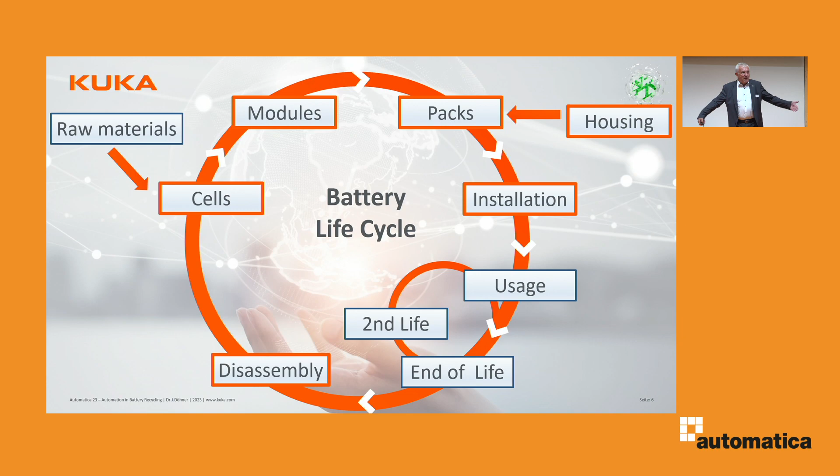Then you need to get these batteries into the car, the installation. We have some solutions here. And then we like to use electrical cars, but it's not a business. Once the car has been on the road for a while, there is the end of life, and then time will tell. Maybe there is an opportunity for a second life before the battery is refurbished. And the first step of battery refurbishment is the disassembly, and then comes the recycling in the narrow sense. And then depending on the outcome, it goes into making new cells, or what is not usable goes into disposal. So that's the battery life cycle.

So the first aspect, of course, is sustainability. Yeah, we all want to save CO2, we want to save energy, we want to protect the environment, be very responsible in the consumption of natural resources and in avoiding waste. So this is a very nice ideologic picture. It gives some triggers, but unfortunately this does not make a business case, as reality tells.

So the next aspect is availability. The materials that are used in battery production are not readily available in large quantities, at least for today's dominant cell chemistries. You have lithium, you have cobalt, nickel, manganese, and these things. And number one, this is a limited resource in that there are no billions of tons available on the Earth.

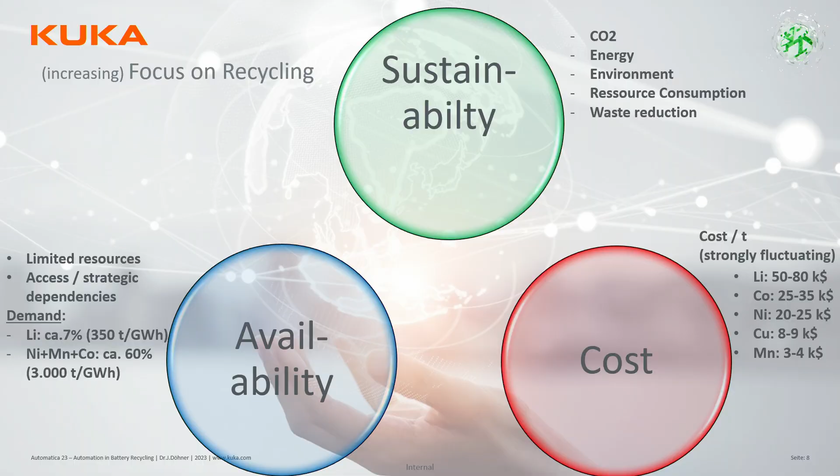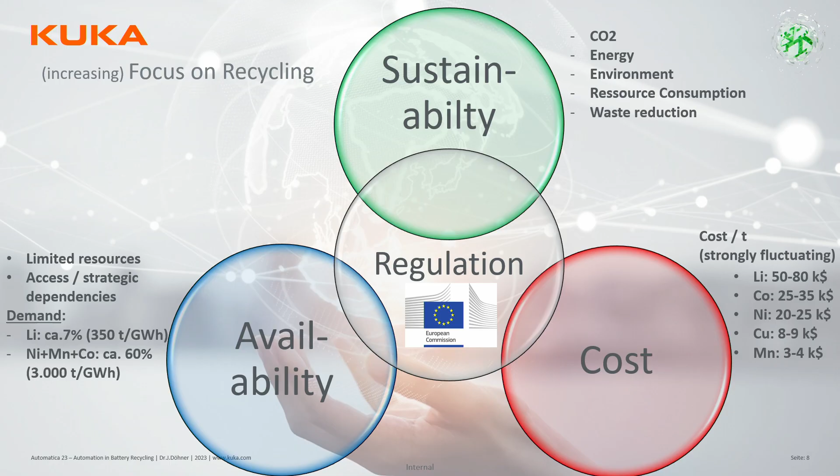So if you multiply these figures, the demand and the cost, it makes perfect sense that recycling is a good way to save money, reduce strategic dependencies, and keep material in circulation. And because this is so, there is regulation. If people are convinced it's necessary, the fact that there is a law and it's mandated is even adding more to convincing people that this is the way to go. So there is some regulation currently in discussion, the new European regulation on batteries. I'm not going into detail, just to give you a brief overview.

This is the structure, so it's a very, very comprehensive piece of work covering many areas. And the most important aspects are establishing through regulation a level playing field, so ensuring that for batteries that are used in Europe, all rules apply whether batteries come from North America, from China, from Southeast Asia, or from local suppliers. So this is one key aspect. The second key aspect is enforcing the sustainability spirit, so establishing a circular economy, including batteries. And then the third aspect is reducing the environmental and social impact.

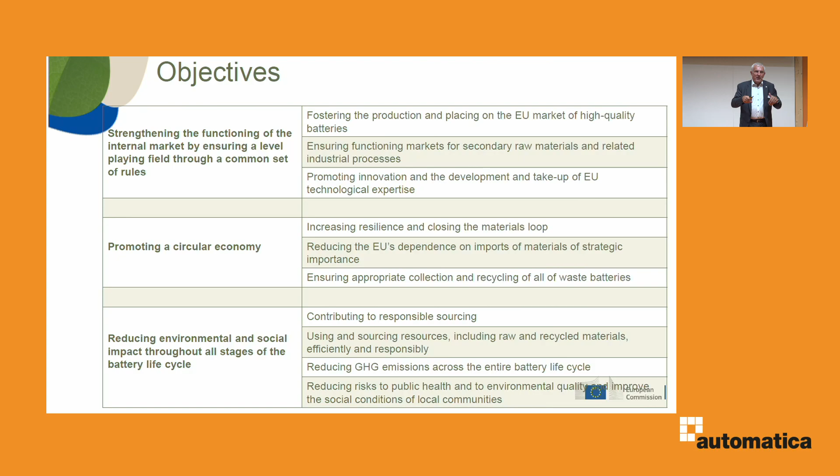Batteries, it sounds funny. I just was talking to someone in the recycling industry. He says it's a big problem that for recycling plastic waste, often installations go up in flames because someone was tossing a battery in the wrong waste bin. So it's been processed, it's been short-circuited, it's getting hot, it ignites the plastic, so it's really a big problem to keep track of batteries and dispose of them safely.

So what is covered in this regulation is actually the complete circle of the battery life, as I was showing earlier. So it starts with the natural resources, it gives some guidelines on mining and processing, on battery manufacturing, primary use, second life, and then also end of life and recycling. So it's a very comprehensive piece of work. It's still in the making. It still needs to be translated into national legislation, but it is coming.

So one aspect is, for example, there will be defined quotas for recycled material. So you need to use X% of recycled material in the production, which is tricky and causing a lot of discussions, but the spirit, I think, is quite clear.

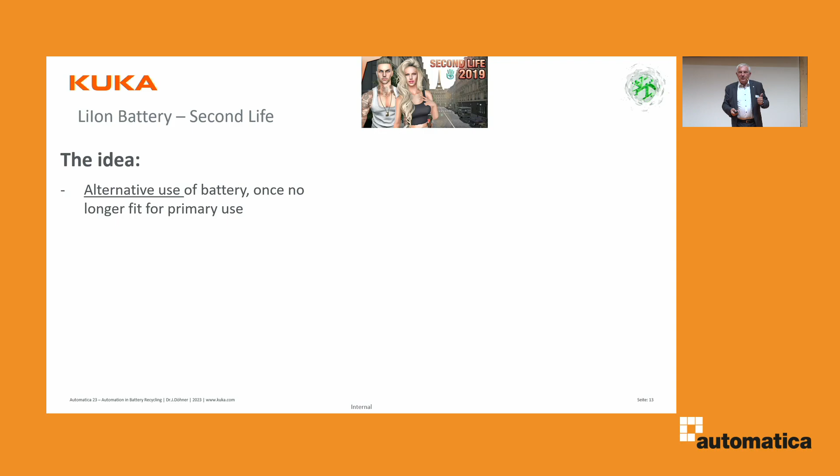So second life is also usually in the discussion. This picture, I understand there is a video game or computer game called Second Life, so I have some visual which has nothing to do with the contents though. The idea of Second Life is quite appealing. So the idea is, if the battery is no longer good for the originally intended use, use it for something else, so to extend the usage period.

An example would be if the car battery capacity drops below 80%, why not use it for home storage, where capacity is not so much of a problem? So that's the idea for power backups. The benefits are quite nice to look at. So you maximize the use of material and energy investment, CO2 investment in the product by dragging out the use. And then from a business perspective, it's nice you can sell the battery twice. First you sell it with the car, and then you sell it as a backup. So it sounds very appealing.

It's, on the other hand, not so extremely straightforward because there are some challenges. A battery is not a battery. A battery is optimized for its application. So for a race car, you optimize for power. For a passenger car, you optimize maybe for energy. For a power backup, you optimize for cycle stability. So it's not quite obvious if the characteristics from the first use are actually suitable for the second use. So this is one problem, which limits the possible use cases.

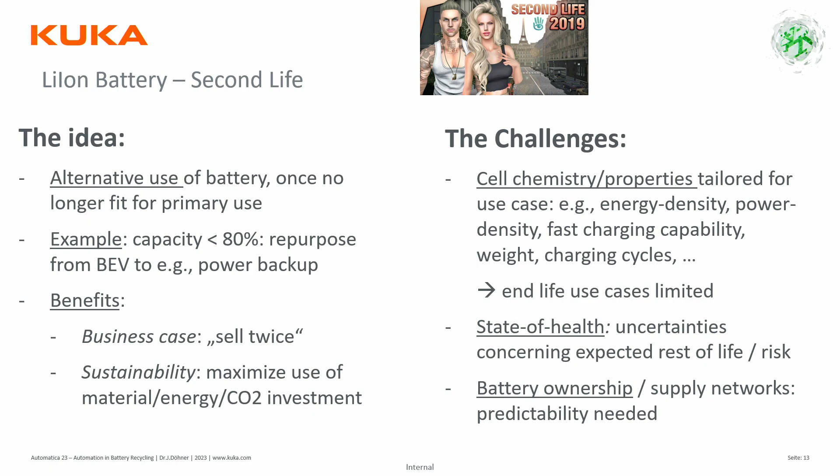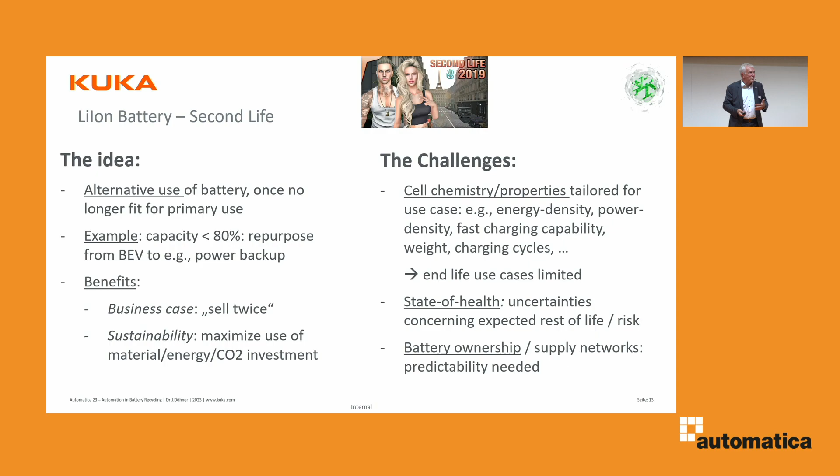And thirdly, a question that is, in my understanding, not really solved as of today is who owns the battery? The battery contains valuable material. Who owns it? Is it the battery manufacturer, the OEM, the customer who buys the car? Who's in charge? And this is so far not really sorted out, so that's kind of the downside. So summarizing that, it's not really clear if that second life will really happen. It sounds like a good idea. A lot of research institutions are engaging here, but I'm not fully convinced whether this will be a relevant volume aspect in the future.

So, talking about disassembly. When people talk about recycling, specifically in the automotive industry, they actually mean disassembly. The recycling, the shredding, and the electrochemical refurbishment of materials is a different story. So I'll go to the aspect of disassembly. When you look at a typical pack, like we've seen in the presentation before, there are a lot of components. So one simple fact is, the higher the concentration of the materials that you're interested in, the better the efficiency to actually retrieve that material. If you are diluting copper with tons of aluminum, you will not get all the copper out as easily. So the logical step is to remove all dead freight from the battery.

So specifically, this means the valuable materials are here in the cells, in the modules. So the job in the disassembly is to open up the pack, take away the lid, rip out the cables, take out the cooling channels, the plugs, the electronics, and most importantly, the battery housing, which alone is well over 100 kilograms of aluminium. So this is really the purpose of disassembly. The question is always, how far do you disassemble? The best practice today, and probably for the foreseeable future, is to disassemble to the level of modules.

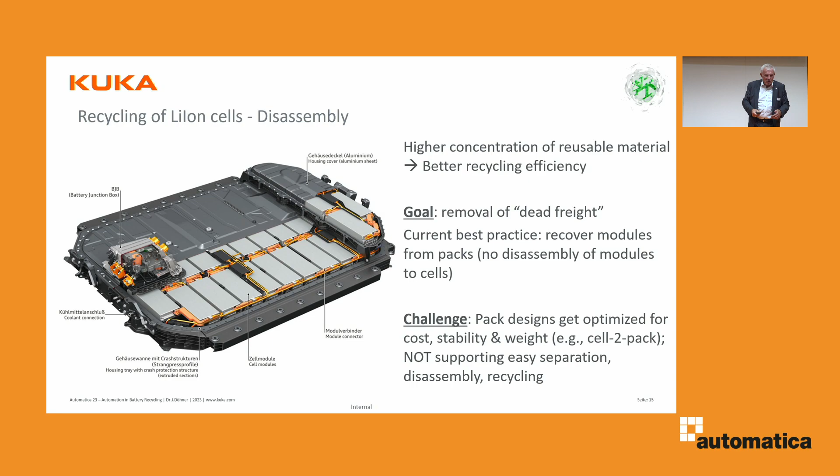So everyone is focusing right now on being competitive and building cheap and solid modules. Yeah? And let's have the kids worry about how you deal with the scrap in 10 years. So that's a little bit the challenge for the disassembly. But then again, it's also an opportunity for automation guys to find smart ways to deal with this new challenge.

So when you look at the figures, the charts always look the same. Yeah? It's increasing rapidly, that's the common denominator. The absolute figures change from week to week, essentially. So this is the total demand in Europe for lithium batteries. So order of magnitude, several hundred, 600, 1,000 gigawatt hours per year is the demand. So in a nutshell, this is what is being produced.

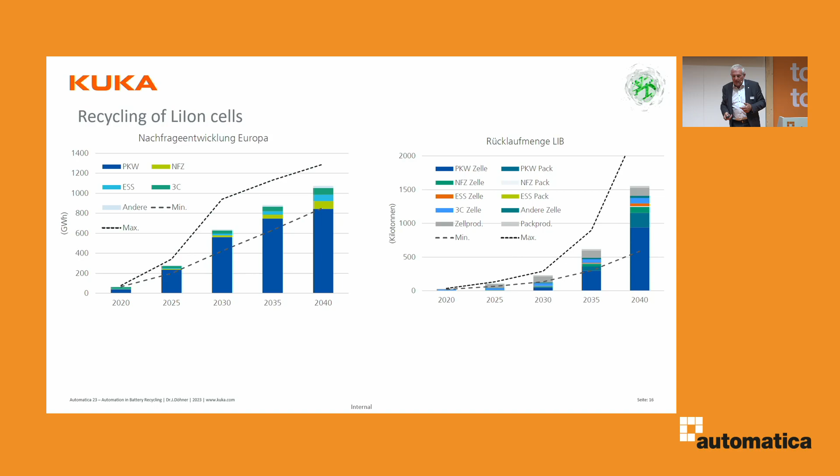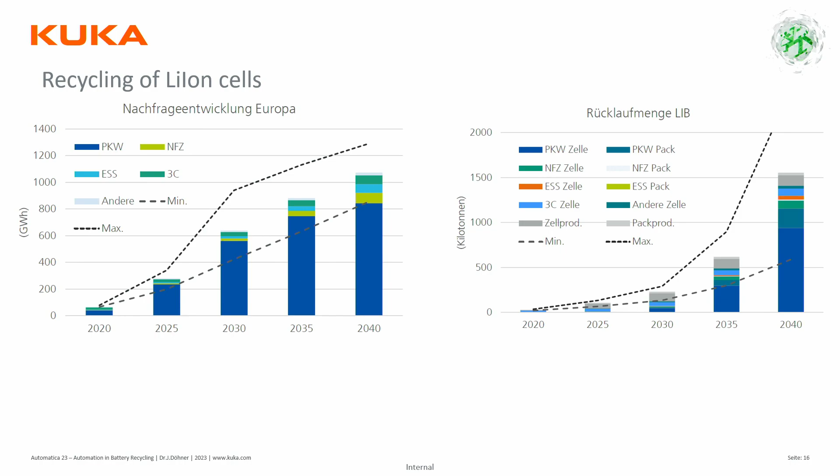When you look at the recycling, so when the completed batteries come back, you will see, oops, this was wrong, the big increase happens 5 to 10 years later. Yeah, because initially, the volumes for recycling are defined by what is called the new scrap, which is the not okay material coming out of cell factories when they are ramping.

Yeah, so no one likes to talk about what exactly are the yield rates when you start up a gigafactory, but it's a safe bet and a safe statement: it's a lot more scrap than you would anticipate. So recently a representative of a big German OEM engaging in battery production said, in the end, when the battery is running very nice and perfect, then 10 to 20% of scrap is a good figure.

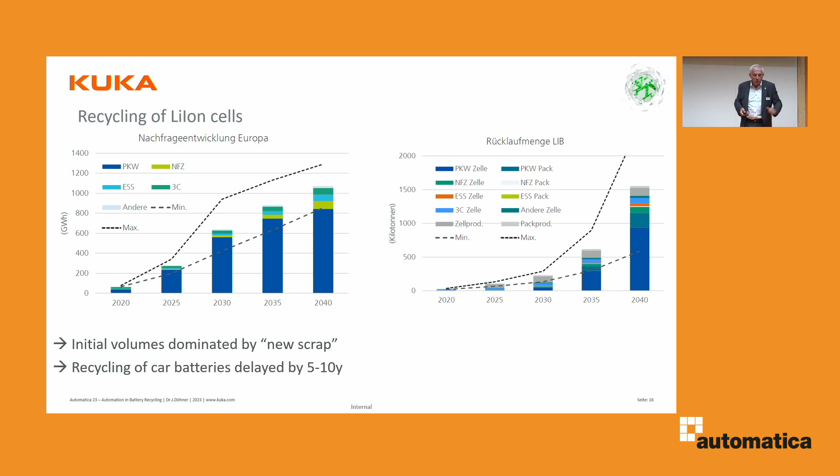So you can translate that while you're ramping up, it's a lot more scrap than that, so you have a lot of material that you need to recycle. Obviously, this material comes in electrode material, which is nice, so there are no cables, no aluminum frames, so it's a lot easier to recycle, and this defines the recycling volume in the beginning. Later on, in 5 to 10 years, you will have to deal with the packs coming back.

Over time, obviously, every electrical car that is being built will come back 5 to 10 years later. Yeah, and the production figures for electrical vehicles are reaching the millions per year. So in 10 years, you'll have 1 million packs coming back. Each pack weighs half a ton, so it's a handful.

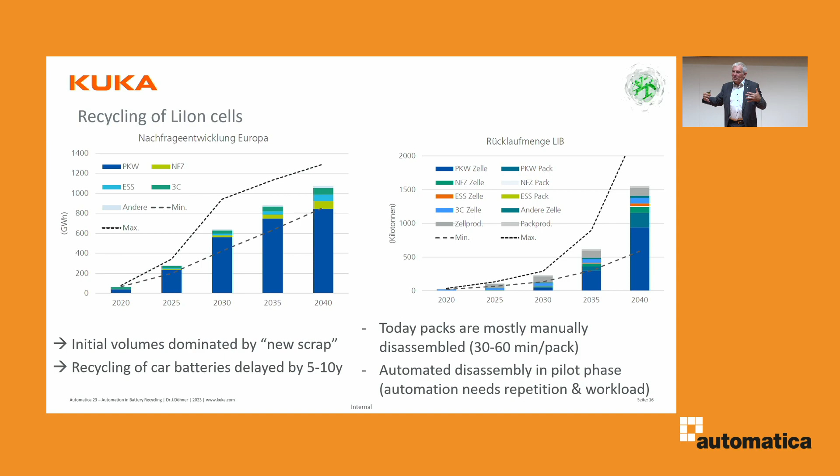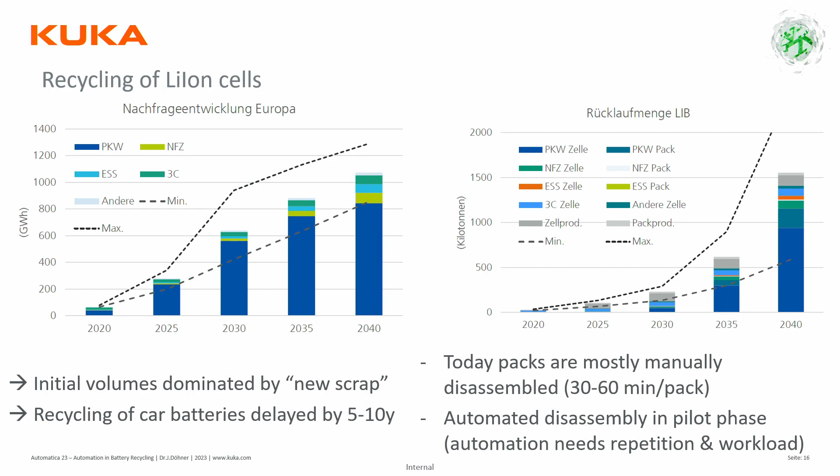So where do we stand today? Today, everyone is seeing the problem in the future, and they start to think, how do I deal with this? Basically, everyone is getting their hands on some used batteries and manually disassembling them, and starts to think about how to automate this process for the future. But as the volumes are, there is no business case for automation yet.

This is just a very brief overview on the fundamental processes. Not to forget, when you have a battery coming back, you need to be sure it's really fully discharged. It may be broken inside, so checking the external terminals may not do the trick. You need to open it and short-circuit it to be sure that it's really safe for disassembly.

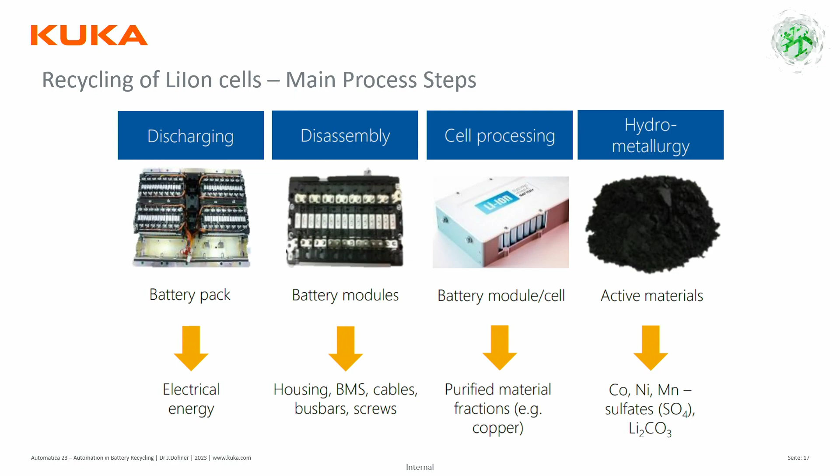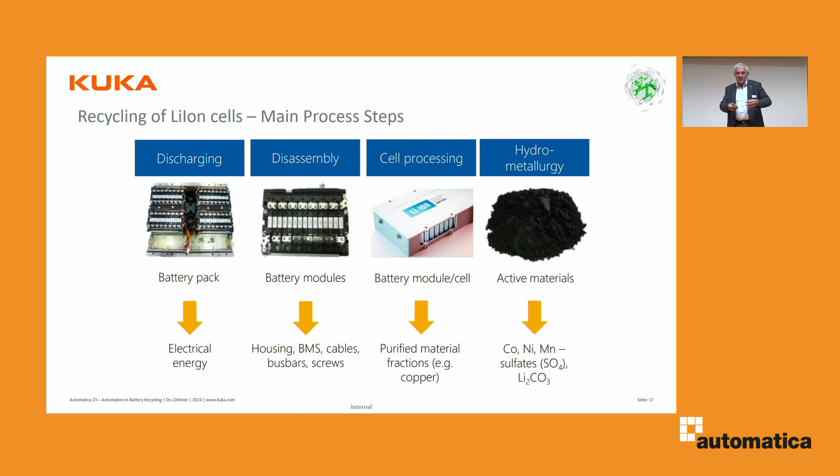Then you have the disassembly. You take out housing, BMS, cables, and these parts. And then basically you shred the modules. You try to separate the materials falling out of this process. And then you have the electrochemical, hydro, or pyro metallurgical processes to really retrieve the materials you're interested in.

So we have taken on the job of how do you automate the disassembly. So we have developed a disassembly cell. Basically, this is using 2 robots which have tool changers, and you bring in a battery, and then you start to unscrew. You machine it open if the screw doesn't move anymore. You can cut open the lids. You can rip out the cables. You untighten the parts. So there is a huge chain of processes that are executed in the cell.

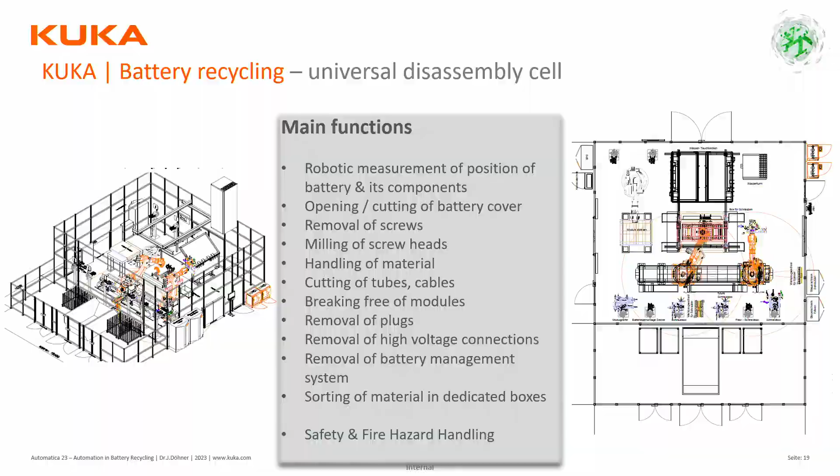Discharging is one thing that needs to happen before, and it's very important. You also need to be aware of the risk. A battery is dangerous. It can catch fire. So in the processes, safety for the people and against fire hazard is a must. So we've done some research disassemblies of several different battery types. We've developed this cell.

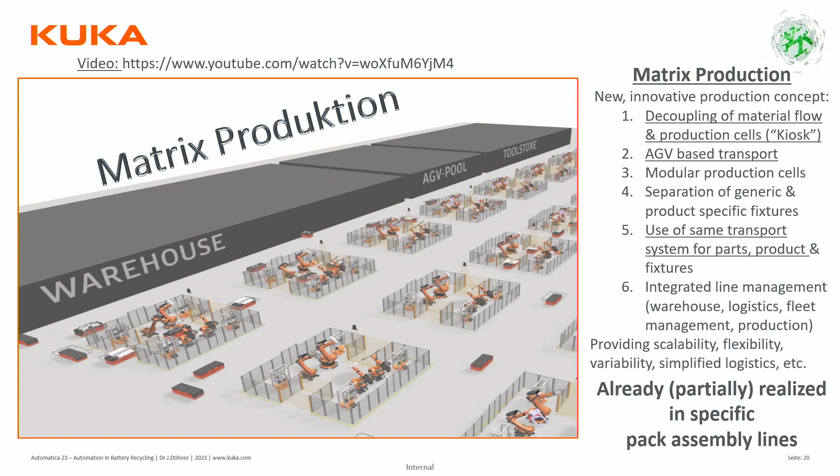And this is a pilot system which can be used by customers to get experience on how to work with that. When you scale, eventually you'll need to handle 1 pack every 2 minutes, like you produce a car every 2 minutes. So then you have to scale this production, and we do have in KUKA a concept called the matrix production. This alone would be an interesting talk. You can learn more about this when you come to our booth if you're interested.

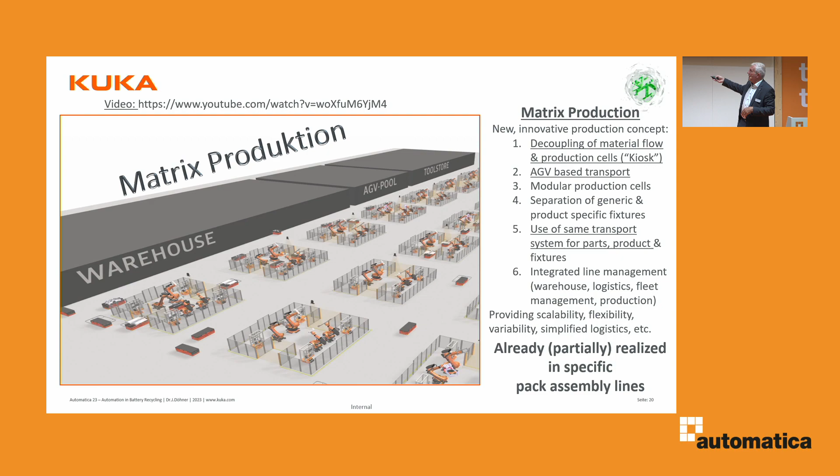But it's basically a concept where we have individual cells. We have AGVs, which can be programmed to run from cell A to B and C. So you can scale by duplicating these individual cells. Or you can split jobs between cells, or you can have different cells for maybe the disassembly of different battery variants. So in any case, this is a nice way to scale the production from a pilot installation to a full-blown commercial volume application.

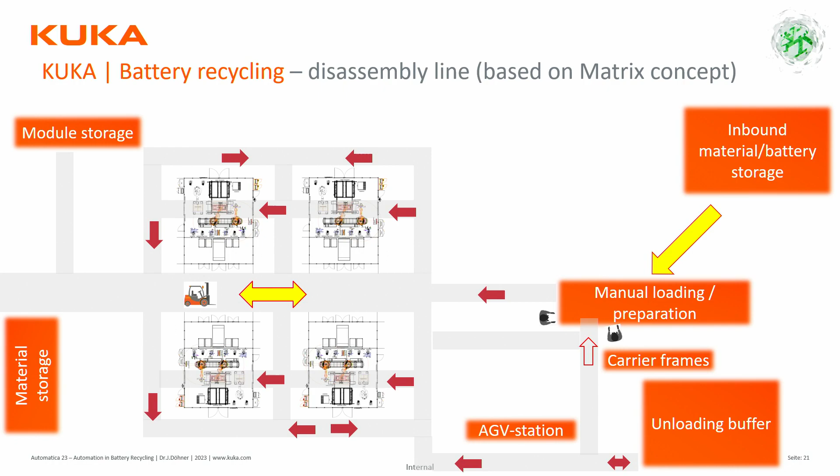So I will not go too much into detail here. It's just showing you can have some common preparation areas. You have some automated transport system which can distribute the jobs and the load between individual cells. And this is about what I wanted to tell given the time frame.

So the brief summary is, number one, battery recycling is a necessity and it's strategically relevant. There was a press release yesterday also in German news saying new production facility for battery material, including recycling. So it's important. Second statement, initially, volume will be dominated by new scrap, which doesn't have the problem of disassembly. The future recycling volumes, however, will be dominated by the full battery packs in 5 to 10 years. And this is requiring disassembly and automation.

But it's a problem for tomorrow. So today, it's focused on pilot installations, not on volume applications. In my mind, there is no clear perspective, maybe yet, of whether second life will be an important volume application. And the problem is that the future battery designs do not yet address the need for supporting disassembly down the road.

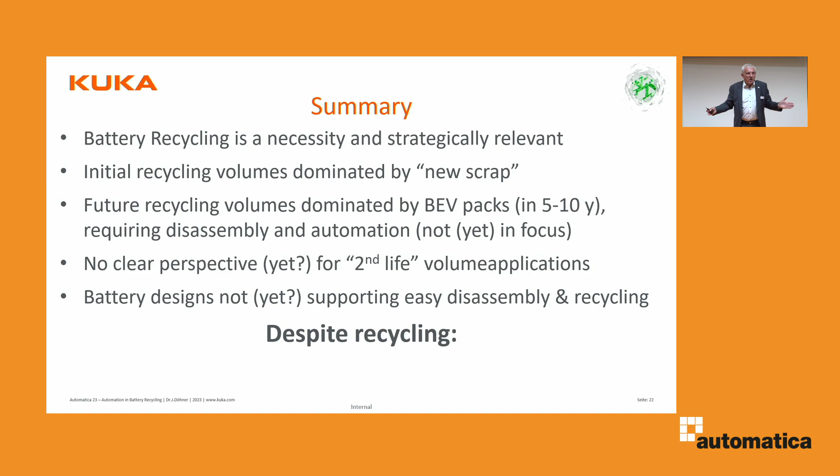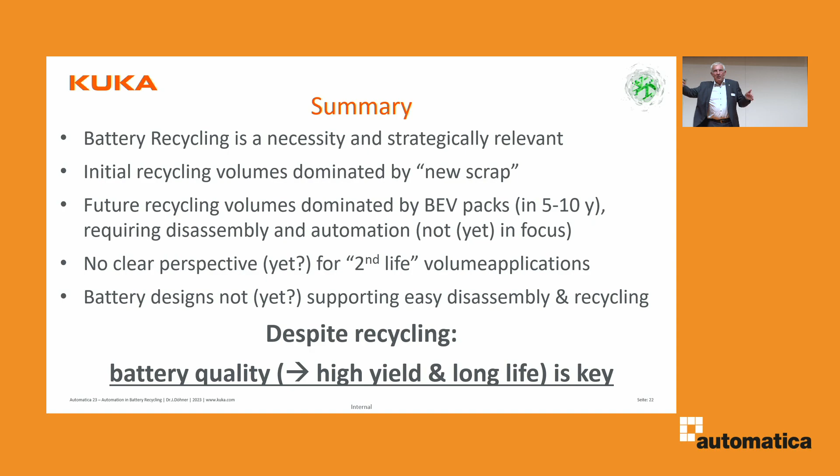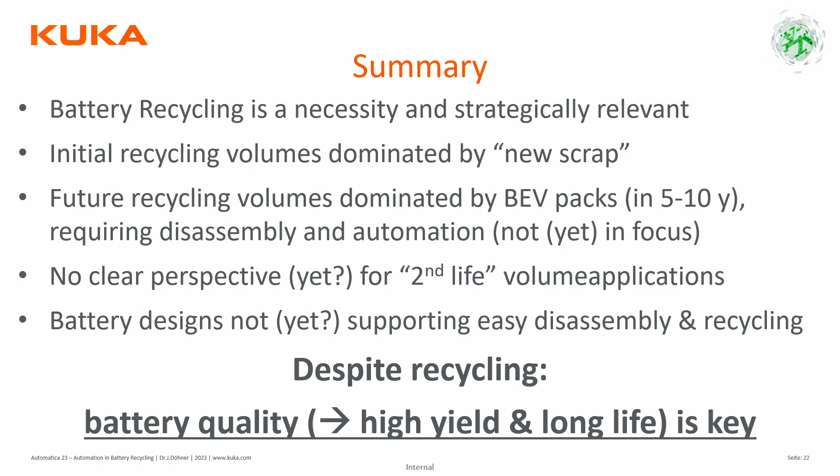And as much as we love recycling, not to forget, and this is my last sentence here, really the quality of the battery and the time that you can extend as much as possible before you have to go to recycling. This is, from an ecological perspective, the most important aspect. So meeting recycling quotas by scrapping everything very early looks appealing to meet targets, but it's actually nonsense.

So I remember my father's family comes from East Germany. They had the planned economy, Planwirtschaft. So they had, for example, Marx, the book. They had a quota for how many books needed to be printed. They had a quota for recycling paper. So the result was quite simple. They met all their quotas in printing Marx's Capital, and drove the pallets directly to recycling. So you had two companies meeting their targets, but obviously completely defeating the purpose. So this should not happen in battery.